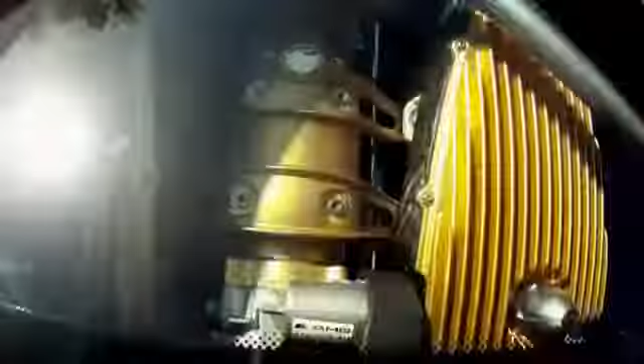This man has driven over 1 million kilometers to develop a new car. But his boss says it's still not ready. This is the story of an engineering crusade to create a car that will persuade the world's richest people to part with €1 million, a challenge that's pushing one of the greatest ever car designers to his limits.

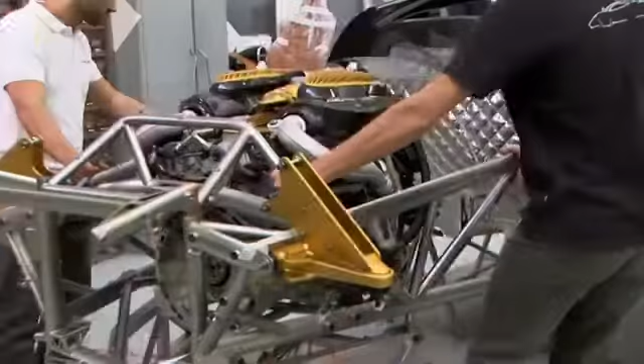In a building that's more like an artist's studio than a factory, a man inspired by Leonardo da Vinci, a man who must be surrounded by the right smells to think, is pursuing his ultimate dream: to build a car that is both an engineering marvel and a work of art. An automotive masterpiece born of a pursuit of perfection so relentless, there's a danger it may never be finished.

Named after a god of wind, this is the Pagani Huayra, a car that has something so special its creator believes people will pay €1 million to own one. But why?

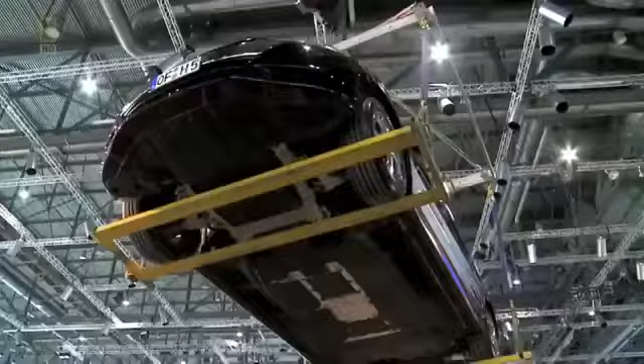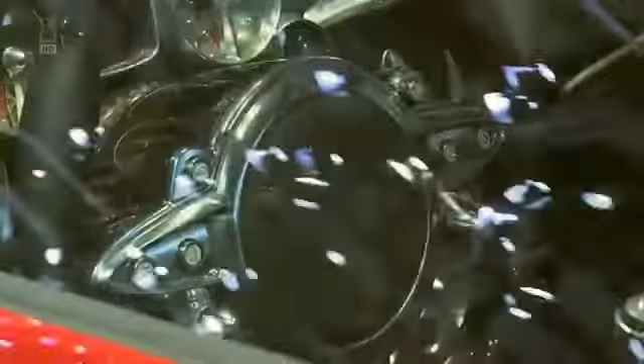10 a.m. The doors open and thousands of journalists and car lovers flock to the Geneva Motor Show. The star attraction is the unveiling of Horacio Pagani's new car, his €1 million Huayra.

But there's a twist. While this may look like a finished car, it's not. In fact, despite years of development, it's far from complete. It may sound crazy to expect buyers to commit to spending €1 million on a car they can't even test drive, but not in the world of Horacio Pagani.

Because this is the man whose first supercar, the Zonda, stunned the world on its launch, and is considered by many to be one of the greatest sports cars of all time.

So within days of the Huayra's launch, Pagani's reputation alone is enough to secure the first orders. And as the Geneva Motor Show comes to an end, the worry for his team is not getting sales, but actually finishing the car so they can build and deliver them.

Back home in Italy, Horacio Pagani has been developing this car for over 8 years. In his pursuit of perfection, he is not a man to be hurried.

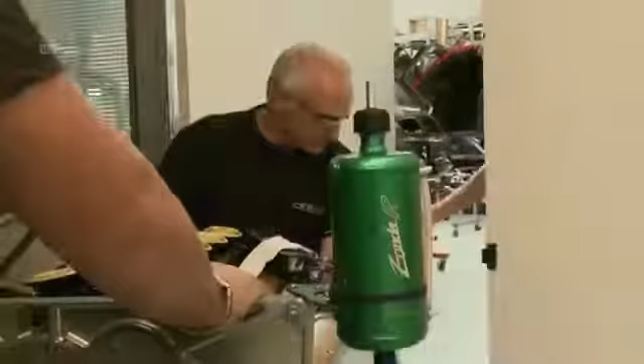Horacio personally designed his small factory, or atelier as he prefers to call it, with his assembly room, component manufacturing, and design studios all under one roof.

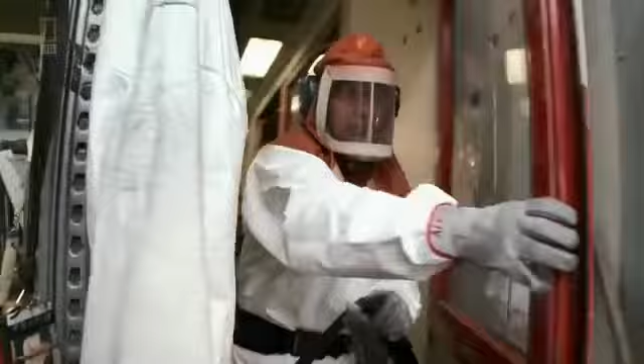This isn't a place where machines are bolted together by robots. Pagani's master craftsmen hand-build engineering works of art. Over the last decade, they've produced 150 unique Zondas.

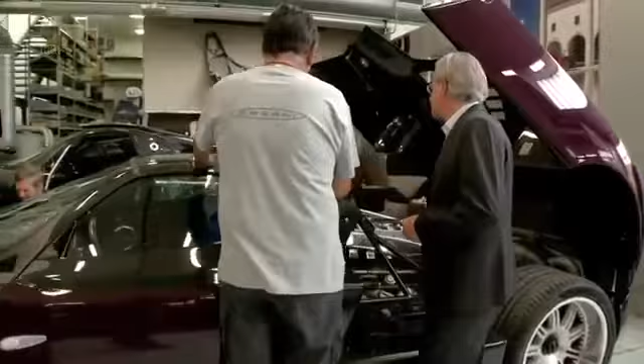But now they're waiting to start building the Huayra, as soon as the boss gives them the nod. But that won't happen until this man's work is done. And 800 kilometers away in Germany, he's still got plenty to do.

Because before any customer will be allowed to drive the Huayra, its extraordinary power and performance must be tamed. Over the last 2 years, Davide Testi has driven a series of Huayra prototypes the equivalent of 25 times around the world. I am the million-kilometer man in the €1 million car. Follow me, and this is my office.

Today, a full 6 months after the launch in Geneva, Davide is getting his first taste of a vital new addition to the car: Bosch's ESP, Electronic Stability Program, a step on the road to a crash-proof car. The system goes far beyond traction control and anti-lock braking, with electronics that can assist or even override the driver to keep the car on the road.

Straight away in this tight corner, I am accelerating fully, and the ESP helps me straighten the car, keeping me on the road. But making this futuristic system work on this car is going to be no mean feat, combining a very light overall weight with a massive 730 horsepower.

Even a racing driver like Davide must show respect. This monstrous 730 horsepower, 1,000 Newton meters of torque is something truly awesome. It's an exciting challenge, but Davide is under intense pressure to get the job done.

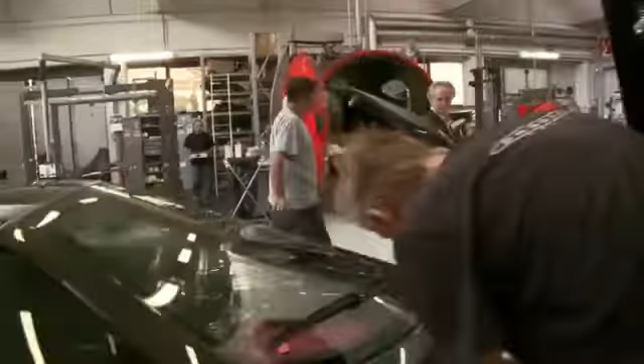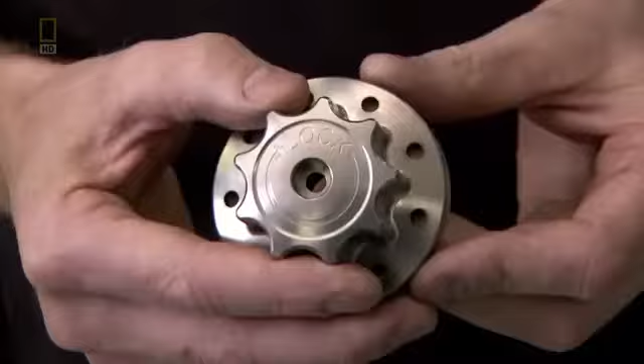Down in assembly, a new chapter for his team of mechanics begins, and the first job is to get their heads around the new parts. Well, this has all been prepared by the guy in the stores. This is a control unit and the ABS. Obviously you've got the monolock wheel nuts here, these are the suspension arms. Perfect, as you can see, everything's got their part number, everything's marked with the Pagani logo. Every washer's like detailed, it's like it's a work of art.

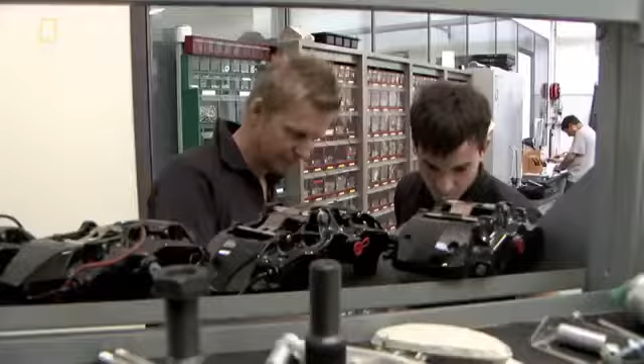Every single thing. Today is a bit of a shock to the system for Dave Lambert, who's built 90 Zondas here in this room. It's all new for us, and it's quite emotional really, because now it's like, nine years I've been used to putting together the Zonda. So this is like everything's new, it's like starting a new job.

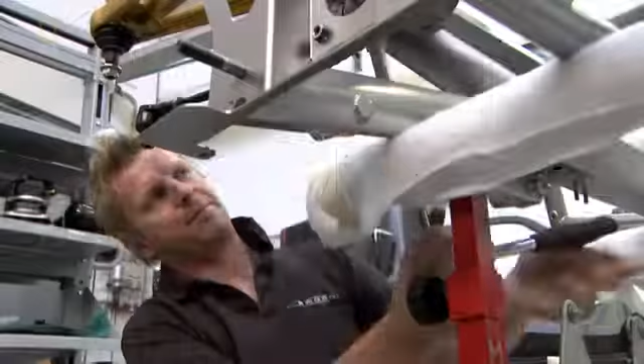The whole thing will be held together with 1,200 titanium bolts at €96,000. That's more than the cost of most complete cars. But there's no manual on how best to build a Huayra, so Dave and his team must make it up as they go along. Our first part of the job is to build the front and back chassis.

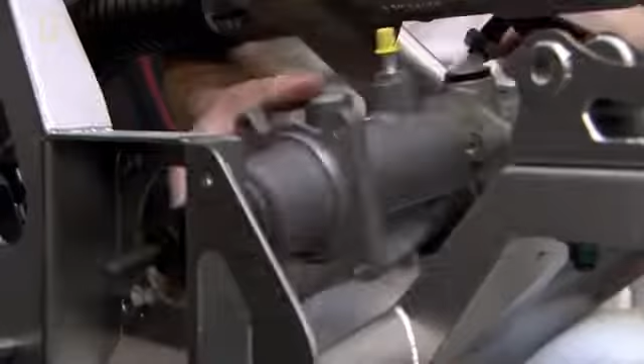The two chassis are lightweight frames made from a very strong form of steel called chromoly. These will later be bolted onto the front and rear of the driver's compartment. Next, onto these frames, most of the heavy mechanical components will be fitted, including the hardware for the Bosch ESP system.

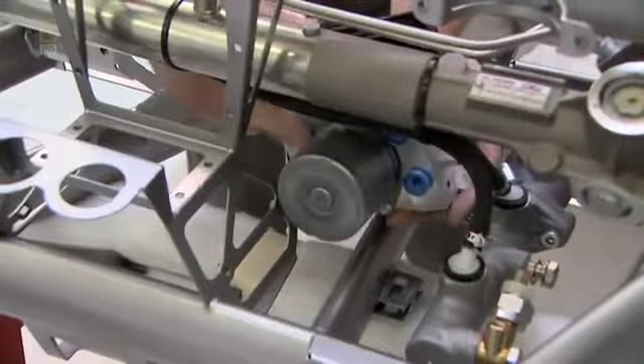But what to do first? That's it, we're just learning that maybe we should have put this on first. Now we've just learned that maybe it's best to put the ABS on before the steering rack. Makes life easier.

While Dave tries to figure it all out, Orazio is never far away, keeping a close eye on the birth of his latest creation. One of the things we don't like about Orazio is that when we go out for lunch, we're just about to clock out and he turns up.

Dave needn't worry though. Orazio is in no great hurry, because even though he has agreed to begin assembly, no customer cars will actually be completed and delivered until the performance has been perfected.

Orazio's vision is to create a car with a split personality, a machine that can provide the legendary thrills and speed of the bad boy Zonda, but has a softer side, a car for all seasons, to take the kids to school or on a luxurious cruise through the countryside.

So this is where the ESP really comes in. It's the key to creating this two-headed god. Davide must fine-tune the system's two very different modes.

First, sport mode. In straight-line testing, with wet and dry lanes, Davide has no problem sending the car into spectacular spins without completely losing control. It's a boy racer's wet dream. I think this is... yes, you can never say how it will work.

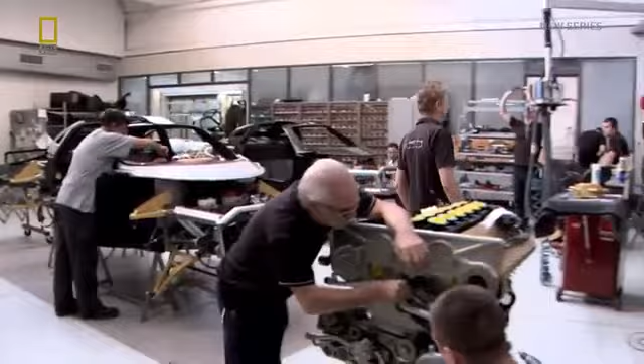Work begins at Pagani every morning at 7:30 sharp. But there's no danger of Orazio ever being late, because his house is inside the factory. He lives and breathes his work night and day.

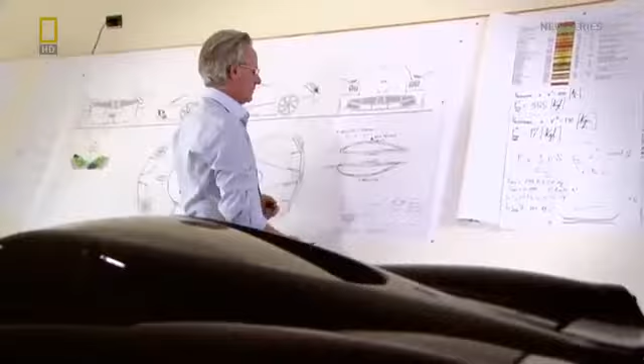With his extraordinary passion for cars, Orazio is not a man to rest on his laurels. So in 2003, despite rocketing sales for the Zonda, he informed his team it was time to pursue a new dream, one so ambitious it would put both his reputation and the future of the company on the line.

Orazio started planning his perfect car with unique engineering features, immense power and speed, but also a softer, more feminine side. Most importantly, named after an Inca god of wind, the Huayra must assault the senses and create intense emotion worthy of €1 million.

This is our mission: to really discover what it is that creates emotion in a client to the point of spending more than one million euros to buy what, in the end, is a car. When there are many other cars that do everything and cost 40 times less than a Pagani.

For Orazio, to create that emotion means combining art and engineering, a philosophy that has evolved from his lifelong fascination with Leonardo da Vinci. Reading an article about Leonardo da Vinci, I found a statement where Leonardo said that art and science could walk together hand in hand. When I read that, it was like a window opened, and I discovered the path I wanted to follow.

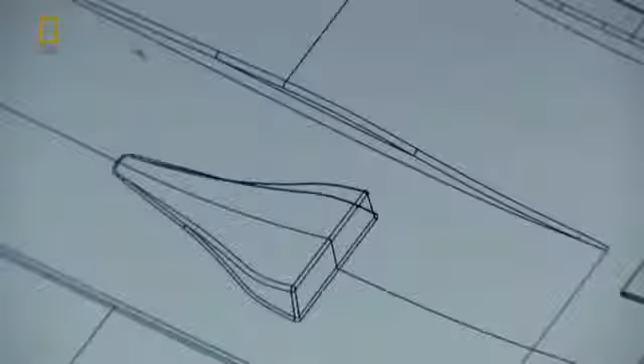The fundamental concept that Pagani communicated to me when I started with his company was his philosophy for work and his philosophy for creating. For him, it is fundamental that an object is both beautiful and, at the same time, functional.

Inspired by Da Vinci, Orazio is determined that every single one of those 4,700 components will not just be made of the finest available materials and be superb engineering — every last bolt and bracket must itself be a work of art.

So Davide Pizzo has had to quickly learn to think both like an engineer and an artist, starting with the overall shape of the car, which is inspired by a great example of form and function in harmony: the wing of an aircraft.

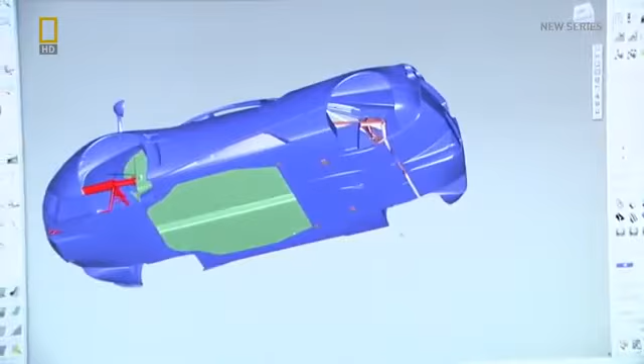So he imagined an ellipse in the front and an ellipse at the back that were united in some way. This was to be the body of the car, onto which the wheel arches were hooked to the sides.

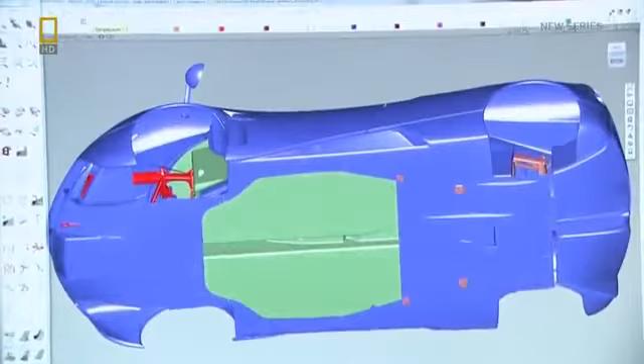From that simple sketch, the long road to the finished design began — from computer screens, to a series of scale models, to a full-sized wooden Huayra.

Pagani asked us to completely clear the finishing area, so the machines were taken outside, the trolleys were moved, and he positioned the model of the car in the middle of the room.

I remember that Pagani spent many hours sitting in different positions around the car, because he had to understand the shape of the car from every angle.

It is only with the one-to-one scale model that you have a complete perception of the shapes and how the lines run. For example, this line that we have been watching for a long time should be more pronounced.

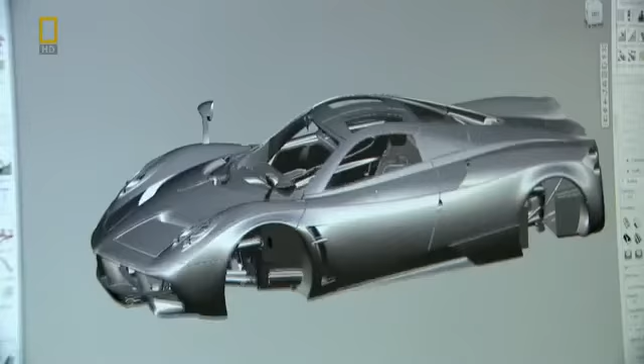At every step along the way, Davide and the design team must think how each small change will affect both the look of the car and its physics — the aerodynamics.

Like a virtual wind tunnel, these computer graphics simulate airflow and highlight areas of drag and downforce. Later, the results can be confirmed in a real wind tunnel. For a high-performance car, you want to maximize downforce but minimize drag.

The problem for Orazio is that most high-performance cars achieve the downforce they need with what he sees as a great big compromise: a rear wing or spoiler. The Zonda is no exception — at high speed, its huge rear spoiler helps glue the car to the road. But for his new perfect car, Orazio wants completely smooth, uninterrupted lines.

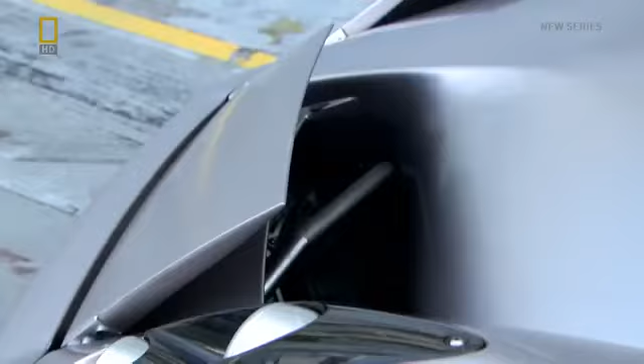To achieve this, he's ripping up the rulebook of sports car aerodynamics, with a solution, if successful, worthy of Da Vinci. Inspired like the car itself by the wing of an aircraft, Orazio has designed a system of 4 independently operating aerodynamic flaps. And what better place to test it than at one of the fastest tracks on the planet?

The 4 flaps are automatically controlled by the car's onboard computer, providing extra grip from downforce only when you need it. You can achieve downforce using spoilers and wings, but the problem is that spoilers and wings are always on the car. Orazio's active aerodynamics remove that compromise.

As the Huayra rockets off down the main straight, the flaps are kept down. This minimizes drag and maximizes acceleration, and the low drag helps achieve a top speed of 370 kilometers an hour.

But equally important to a quick lap time here at Monza is how late you can brake, how fast you can slow down. So as soon as Davide's foot hits the brake pedal, the flaps automatically rise, just like the flaps on an aircraft wing, becoming high drag air brakes while maximizing downforce to get the most out of the tires.

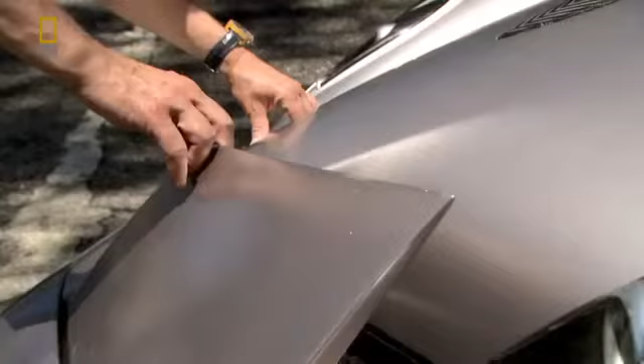If it catches on, this innovation could change the look of all sports cars for the next generation. A technical solution better than a rear spoiler that also delivers the pure, uninterrupted lines that Horacio so wants for this car, and a perfect example of the philosophy of art and engineering that he's been pursuing since childhood.

The son of an Argentinian baker, Horacio spent his childhood dreaming of building Italian supercars. In 1984, he got a job at Lamborghini and moved to Modena, where he quickly became an expert in a new aerospace wonder material being used in sports cars for the first time.

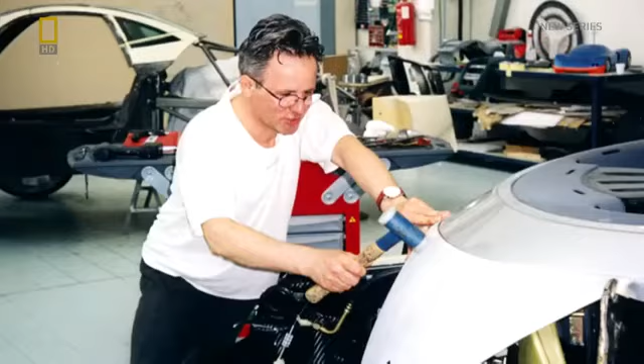Over time, I made friends with carbon fiber, an extremely technological material. Of course, at the beginning, it seemed to me like something from outer space.

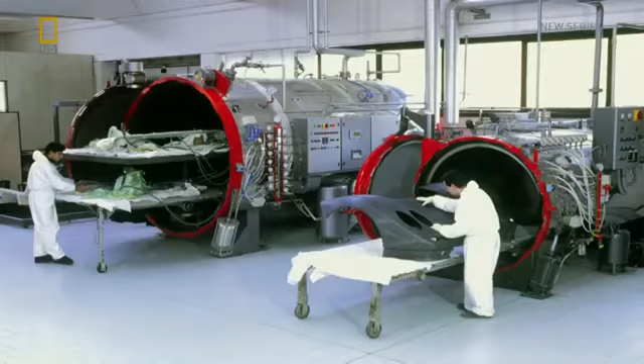When he built his factory in 1991, Pagani started out as a composites company, designing and building components for the industry. Composites have an unrivaled strength-to-weight ratio and the versatility to produce extraordinary objects of desire. So remaining a world master of this material is essential to Horacio's mission to create a perfect car.

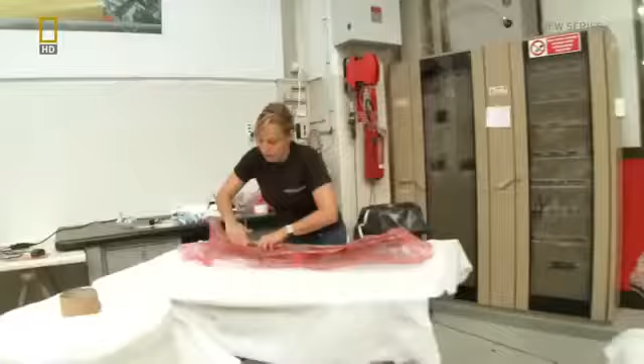Today, the responsibility for keeping Horacio's composites on the cutting edge falls to one of his most loyal young protégés. I like working with composites because it is a very beautiful material. It's Roberto's mission to make the Huayra's composite components the best in the world.

Starting with a unique soft fabric produced only for Pagani, carbon threads from Japan are woven together in Germany, then soaked in resin in Italy. Only Pagani knows the whole recipe. The result is our unique carbon fiber, our fabric.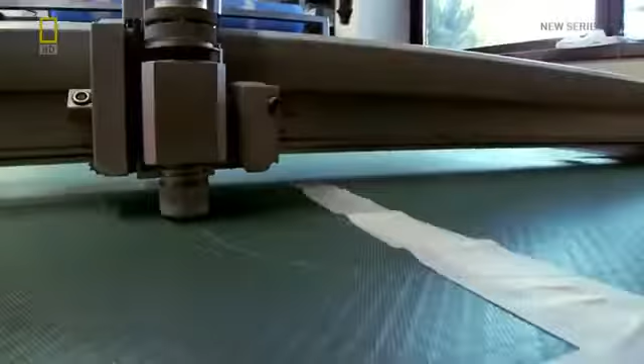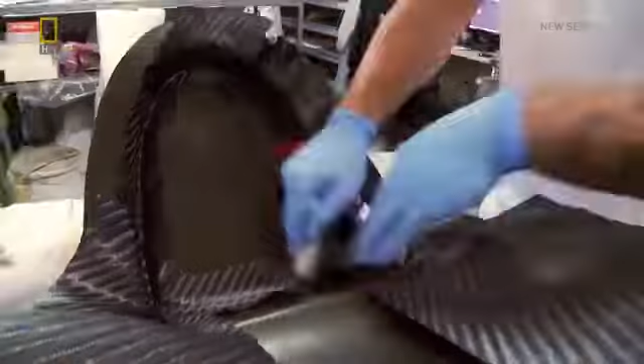In a workshop resembling a Savile Row tailor, Roberto's process of laying up the fabric into molds looks straightforward, but attention to detail here is crucial to the end result. Then, each component is vacuum-packed for baking.

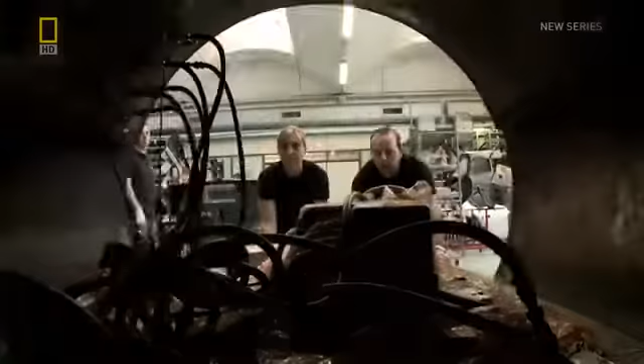Here we are at the autoclave, which is an old friend to me, because without this machine we would not be able to produce our beautiful car. As an expert cook, Roberto knows the exact time, pressure and temperature required to harden each part. After 2 hours at 135 degrees Celsius, these ones are baked to perfection.

Roberto inspects every baked piece, and if it meets with his approval, it's sent off to the nastiest place in the factory, the trim station, where Alessio needs full body protection and breathing apparatus to keep potentially lethal carbon dust out of his lungs.

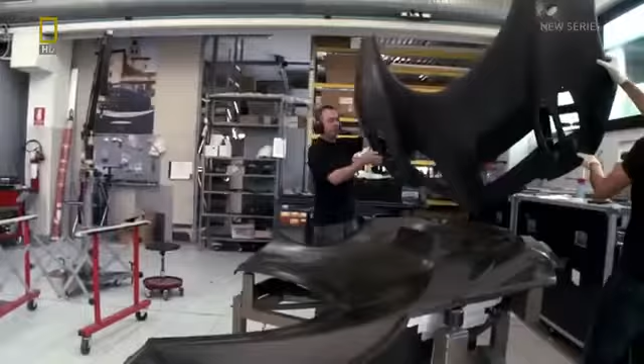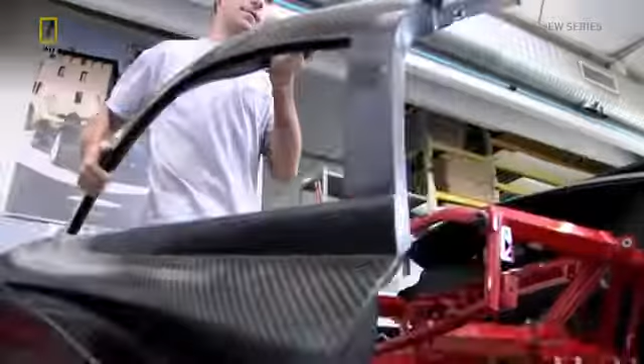Before painting, the composite components are assembled into the skeleton of one of the first customer Huayras. It's a standard step to make sure that it all fits together. But here, there's a difference. This is where Roberto's meticulous care pays off, because every seam of carbon fiber weave must line up perfectly, and if it doesn't, the part will be rejected.

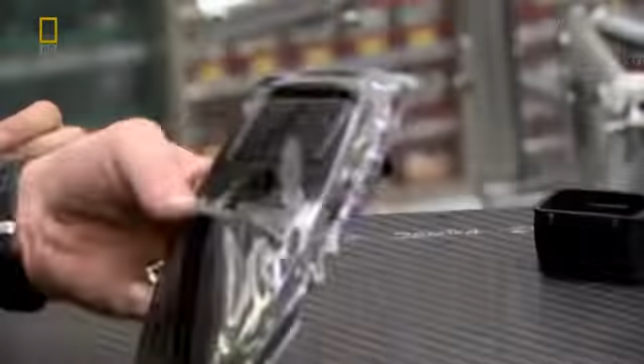The quality is so good, many customers choose to have large areas of polished, unpainted carbon composite as part of their final design. And of course, Horacio has approved each component as a perfectly designed piece of art and engineering, with exactly the strength, weight and aesthetic form he wants.

This piece supports the seat from under it. This is a piece Pagani is very happy with. This is because if one day a client drops a penny and looks for it under the seat, this piece is beautiful.

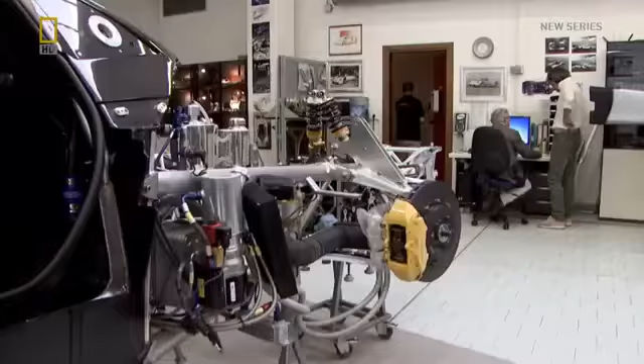As a committed perfectionist, Horacio's hands-on approach is understandable. But to build this car, he will rely on dozens of outside suppliers to build the remaining 95% of its components, and he can't exert the same control over them. Or can he?

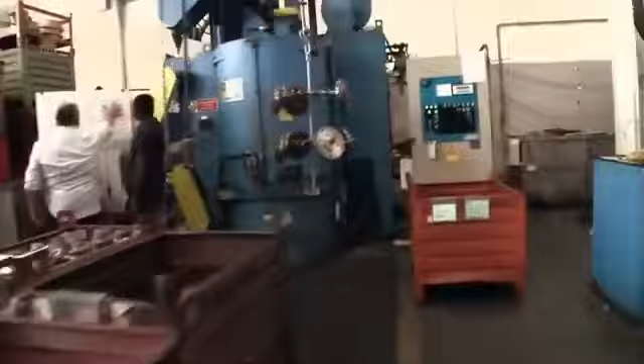On the far side of Modena lies an aluminium factory. 10 years ago, this company decided to try and win Pagani's business, little realizing just what they were letting themselves in for, or how it would transform their lives. Not least for this man.

Benvenuti in Aspa, welcome to Aspa. This is our old factory where we produce pieces for aeroplanes, products for the nautical industry and other products as well.

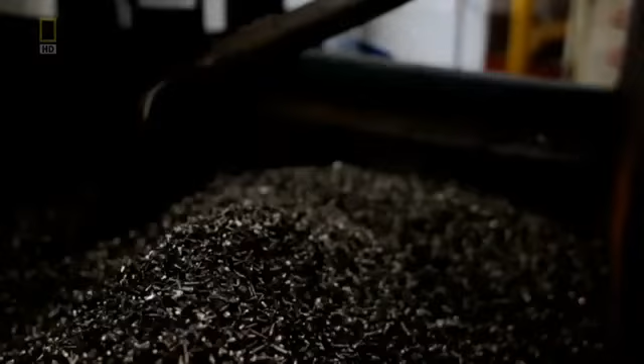It's efficient and functional, but also dirty, noisy and smelly. Not really in line with the Pagani way of doing things. But this is... Ecco, questo è il nostro nuovo reparto.

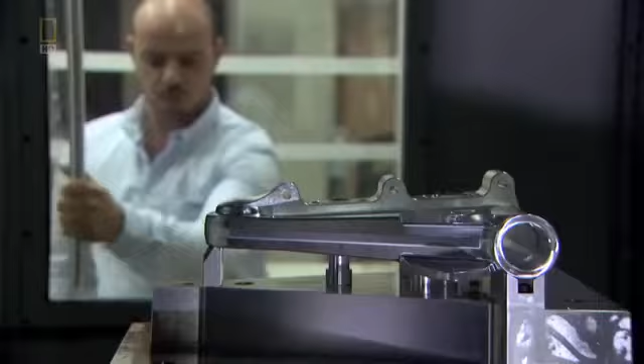To convince Horacio that they were the company to produce his aluminium components, Aspa built a completely separate facility alongside the main factory, filled with state-of-the-art machinery, light, order, and air-conditioned sterile cleanliness. Even the neatness is higher than in the old department, in order to produce what our customers are looking for, especially Pagani.

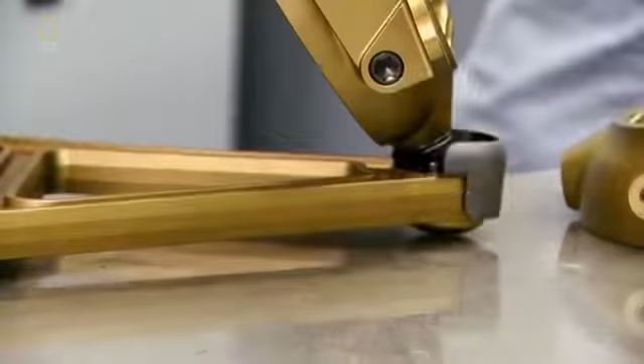As Horacio's collaborator, Maurizio must embrace his crusade for perfection. When Pagani designs something, Aspa must work out how to make it from a single block of aluminium. Sounds simple? Not with Pagani.

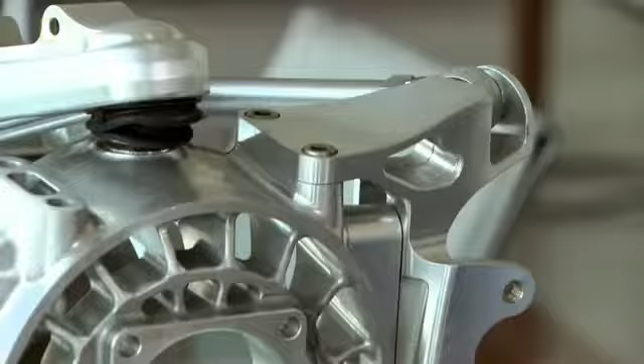Early in the design of the Huayra, the development of this two-part wheel hub became a labor of love. When, after a year of study and work, the first component was created, Pagani had some doubts about it. I was not convinced, because there were many bolts, many components and parts that could break, and for me, it wasn't aesthetically the best.

So the two companies worked together to develop a totally new single-part wheel hub. Of course, it seems a very simple result now, but it required deep research and almost one year of manufacturing. It's not been easy to make, to achieve this result.

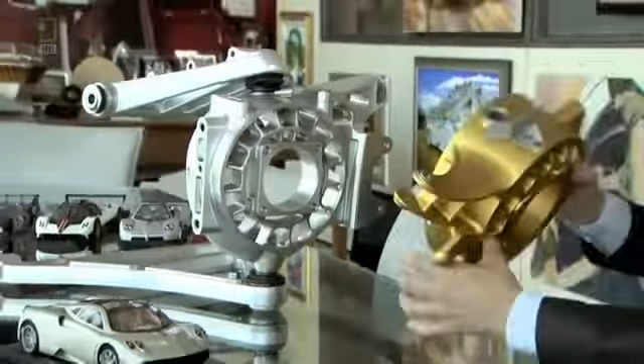It may not have been easy, but the end result cleverly combines two parts into one, saves weight, is cheaper to manufacture, and for Horacio at least, is worthy of exhibition in a gallery.

But apply that approach to 260 different components, and Aspa had their work cut out. Horacio has made Aspa his collaborators, not his suppliers, and he has made them better. The facility they created for Pagani has now attracted over 15 new clients, and business is booming.

For Horacio, this tough, no-compromise approach is essential to achieve his perfect car. So he spent years building up an international network of tried and trusted collaborators, working closely to develop his tires, engine, gearbox. In all, over 95% of the car.

For the leather interiors, he chose a small company near Turin, who he felt were ready to think outside the box.

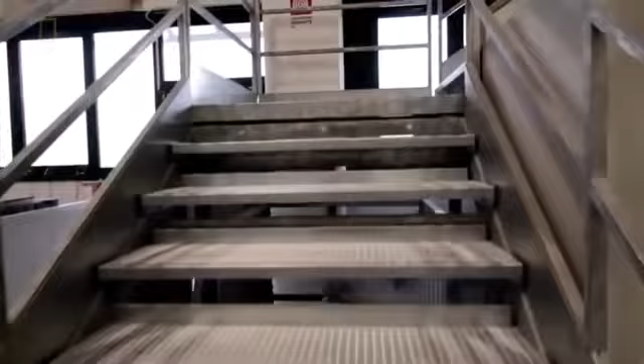Salt is a handcraft leather factory that's been producing luxury interiors for cars, private planes, and even helicopters for decades. And here, Horacio found another kindred spirit.

For us, it's very important to work with Pagani, but it is also a challenge at the same time. It is hard to obtain what he wants, because he is a very particular person who always strives to reach the top, so there is no room for errors.

The leather interiors will be a key part of Horacio's assault on the senses: vision, touch, and even smell. So from day one, he was determined to push Silvio out of his comfort zone.

So before they came in, I sprayed some scent of freshly cut grass, just like when you cut it with a lawnmower. It was a device to take the tone, let's say, of our conversation and also our souls to a higher place.

In that higher place, they might be more receptive to the impossible challenge Horacio had in mind. Something quite feminine. When I told them what I wanted to do, I showed them a lady's handbag.

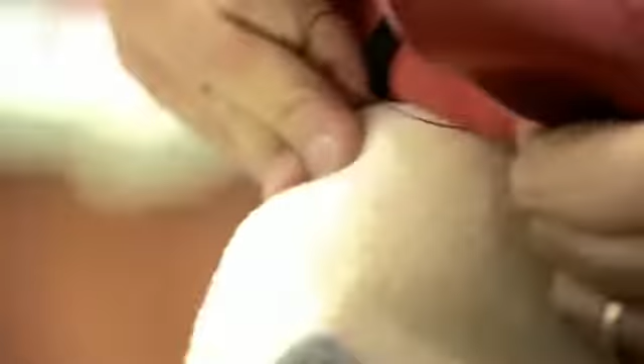Foam padding is applied and shaped. Then the bespoke leather skin is carefully smoothed into place, almost as if it's going back onto the animal it came from. It's stuck on with special maneuverable glue. When the leather's in exactly the right position, the glue is set with a hairdryer.

I think that after all this work, we managed to reach the required level of quality. We're satisfied with the product, and I believe Pagani will be happy too.

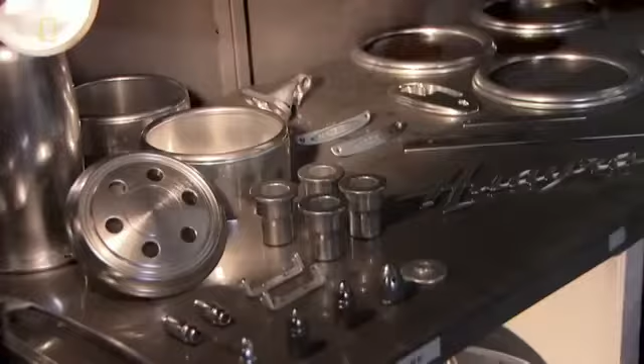Orazio is so pleased with his collaborators' work, he displays their components like trophies in his art gallery of parts at the factory. Orazio may regard them as his art collection, but Dave Lambert's desperate to get them out of the cabinet and onto the new car he's assembling.

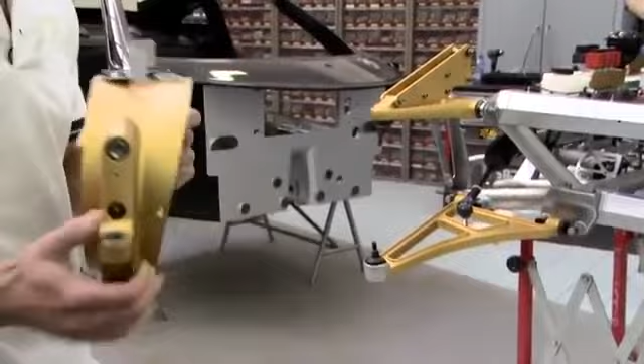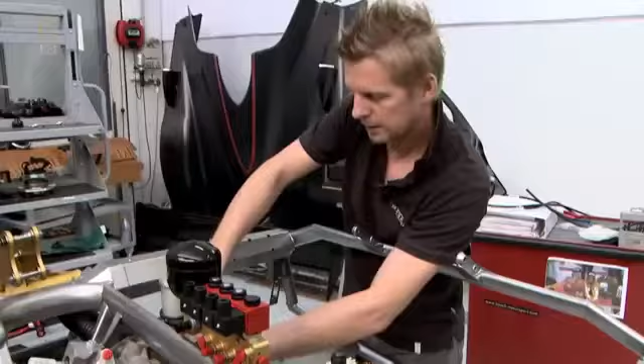The suspension pieces are the first aluminium components to go on. Racing-style wishbone suspension, developed for weight loss, performance, and aesthetics. This suspension here was actually developed first of all on the Zonda R, on the race car. It's very, very similar. It's almost identical to the Zonda R suspension.

With all the mechanical components in place, the chassis frames can be attached to the tub, which is the key component in the safety design of this high-performance car. The tub is a protective monocoque for the occupants, made from the strongest composite material in the car, reinforced with threads of titanium.

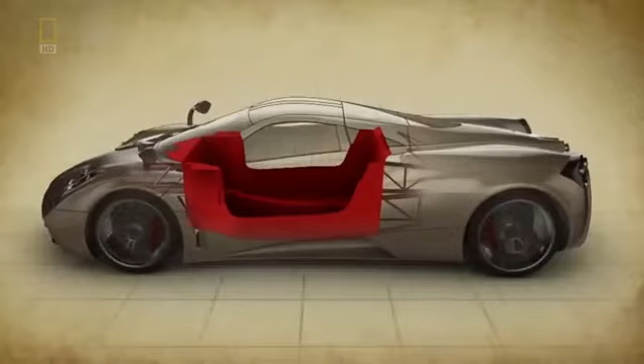But each frame is attached with just 8 titanium bolts. And this is one of the chassis bolts here. Bolts that, when necessary, are intended to fail. In a head-on collision, the chromoly steel frames are designed to crumple, absorbing the energy of the crash in a very similar way to most cars.

But Orazio knows that making a side-on impact survivable can be much harder. So in a high-speed sideways collision, those 8 titanium bolts will snap, and the whole rear chassis will break away from the car, dissipating huge amounts of energy so that the passengers have a much better chance of survival, cocooned in the carbon titanium monocoque.

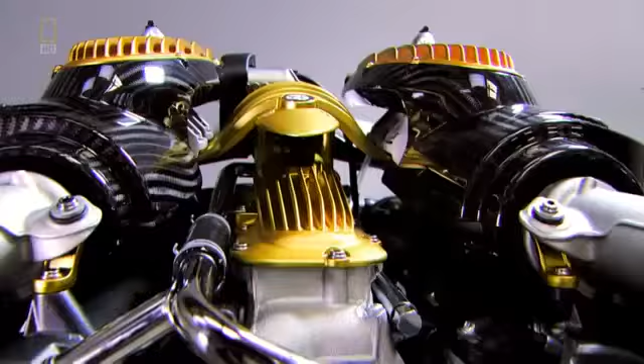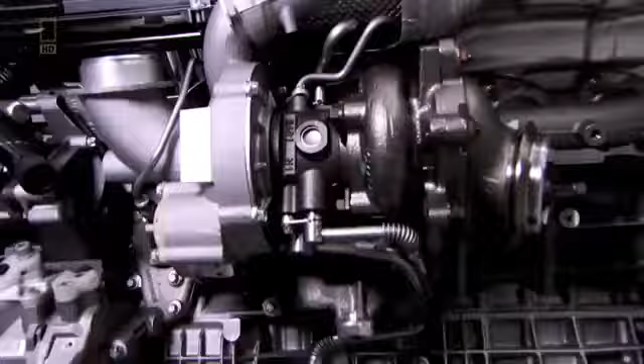A new day brings a new toy for the assembly team. A brand new gleaming 6-litre Mercedes AMG V12 engine, generating 730 horsepower. But it achieves that using a device that most Pagani fans might not expect: twin turbochargers.

A turbocharged engine is the most efficient way to produce the massive power Orazio wants for the Huayra, and will help pass emissions standards to make this car legal for sale in every country in the world. But turbo engines have serious drawbacks.

Pagani made his name with the naturally aspirated Zonda. Its powerful engine has great responsiveness and a mighty roar, qualities not normally associated with a turbocharged engine.

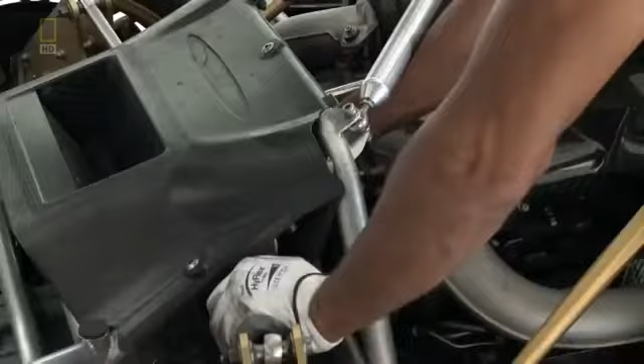So Davide Testi has spent many of his million kilometers working closely with AMG to adapt their engine for the lightweight Huayra. Improvements to the cooling system, the engine management system, and the turbochargers themselves have produced a car with massive but responsive and controllable power.

We arrived at a beautiful compromise. I'd say optimum result, because even though this is an engine with 1,000 Newton meters of torque, the engine is manageable. It's easy to drive. It really is a beautiful engine.

But one very serious problem remained. Turbocharged engines are notorious for sounding weak and whiny. Just not what you need for a successor to the thunderous Zonda.

So to solve this final challenge of creating his perfect car, Horacio went in search of a special talent. A man that can sculpt sound. A master in the dark art of exhaust pipes.

He came to our door, rang and said, 'Hello, I'm Horacio Pagani.' We met each other here and it was a great encounter. We got on right from the beginning. He loves technology as much as I do, especially the beautiful things in technology.

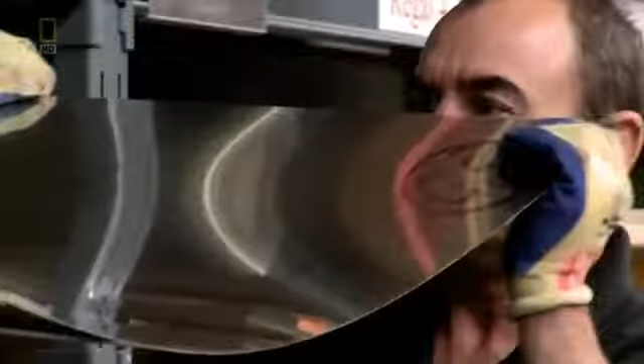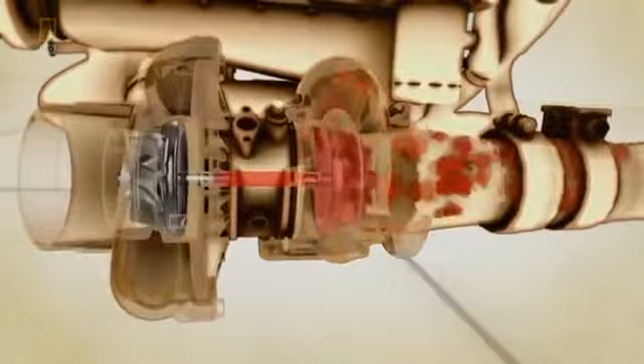So Martin and his factory took on the huge challenge of making a turbocharged engine sound good. A turbocharger is a very efficient way to make an engine more powerful. It does this by using a fan driven by the hot exhaust gases, that drives a second compressor fan that pumps more oxygen into the cylinders, producing more power.

The problem is that the turbocharger breaks up the flow of the exhaust gases, mashing up the beautiful thumping V12 sound coming out of the engine. It's like a nose being held, so it doesn't allow sound to travel like in a naturally aspirated engine.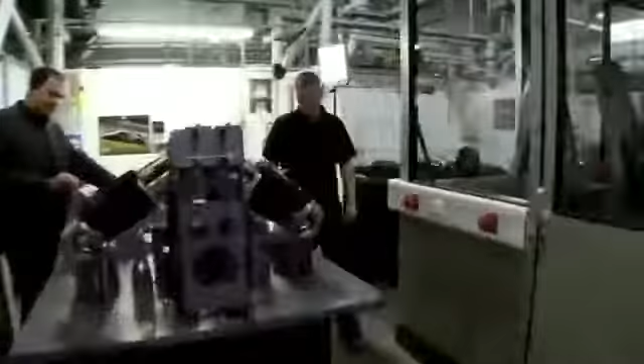Martin Hagler specializes in making engines sound beautiful. But to achieve that with the turbocharged Huayra, he's going to need something very special. Fortunately, he has a plan.

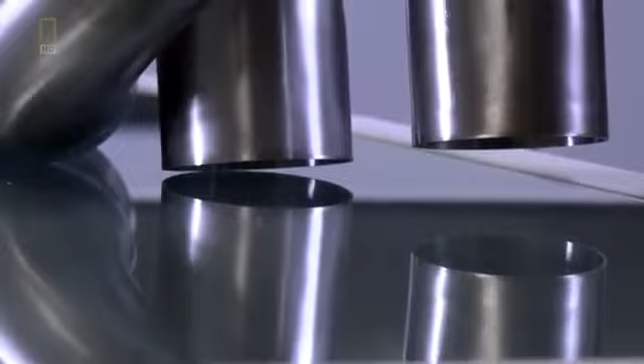All that you can see here are parts that are tuned exactly to the acoustics of the engine. And that's the basis for the sound. It is the same as the tuning of an instrument, like a horn.

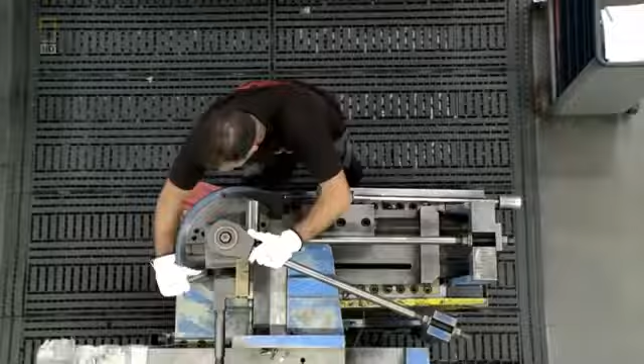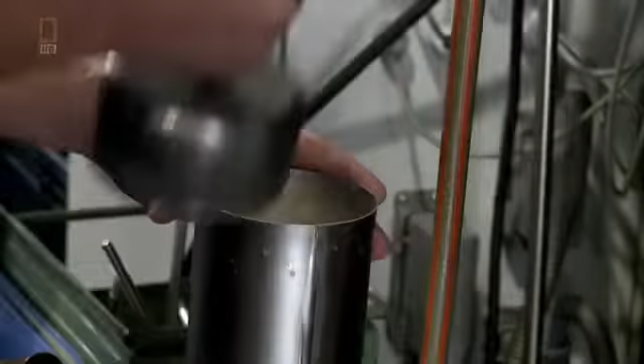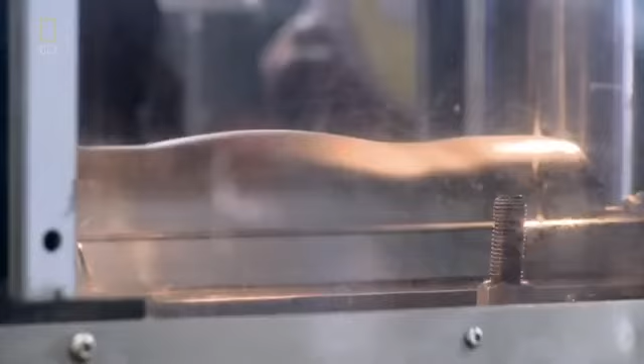Often complex shapes, many of Martin's components require an ingenious process to form them, called hydroforming. The silencer is made this way. A straight pipe is first filled with water, then laid in a mold inside a hydraulic press. The water pressure inside is pumped to 1500 bar, which stretches the millimeter-thick titanium into the desired shape.

It's a very natural shape, very stable. And when you lift it up, you notice it is not heavier than plastic.

Already a thing of beauty, Martin has another trick up his sleeve to enhance the silencer still further. A trick that simply involves a dusty old oven. No chemicals or additives, just heat and precise timing. It looks like a magic trick, but it's a natural process.

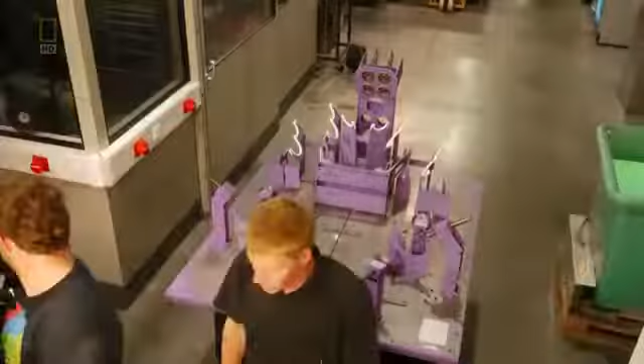Together, Martin believes the 14 sections of pipe will deliver some stirring turbocharged music. First, he splits the mashed-up exhaust from each turbo into 2 separate tubes. This smooths the quality of the sound.

Then it passes into the silencers, which in fact aren't silencers, but the opposite, empty echo chambers that amplify the sound. Inside, Martin has left a small gap, like the hole in a flute or a recorder, which the now smooth air blows through to create a roar.

As always, the first to find out if this ingenious design has succeeded is Davide Testi. Driving the Huayra for the first time, you have a feeling of something really massive beneath your back. And the loud noise of the turbos, if you close your eyes, makes you think of an aeroplane about to take off.

For the car inspired by an aircraft, Martin has given Horacio a jet engine roar.

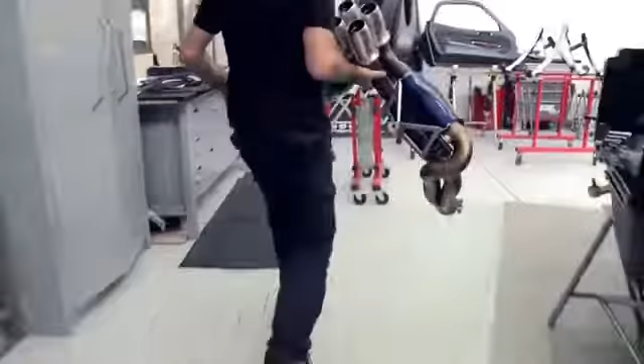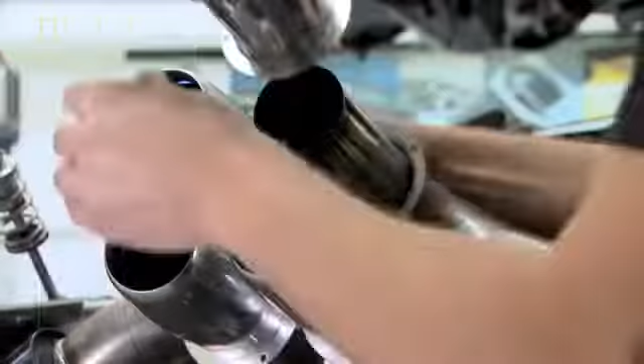With the delivery of the exhaust system, Dave and his team now have all the components they need to complete the first customer cars. The output from each turbocharger is fitted with a catalytic converter, and then the rest of the exhaust system can go on.

Onto the chassis, the skeleton of the car, goes the wiring, the nervous system of the machine. Now work on the interior can begin. Polished carbon fiber panels and soft Turin leather to the customer's exact specifications.

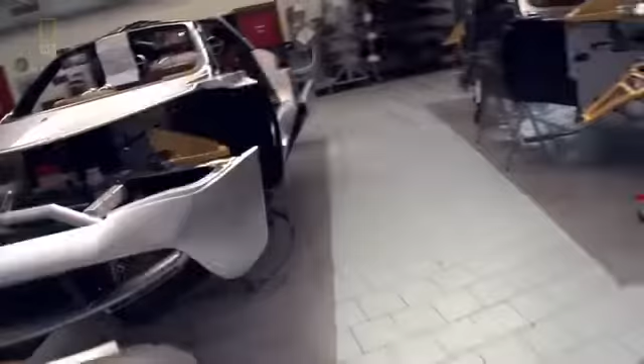Finally, Roberto's outer composite body parts. The bonnet, doors and side panels go on. And after 3 weeks of assembly, the car is complete.

Which means it's time for Davide to take one last drive, to find out if the Herculean task that has taken him 25 times around the world is done.

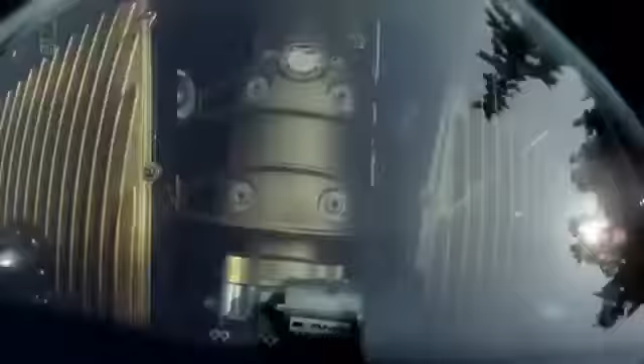With turbocharged power and the ingenious exhaust, unique aerodynamics, fine-tuned electronics, and a set of Pirelli's finest tyres, does it thrill with the thrust and roar of a jet aircraft taking off?

A big sigh, and let's say that we are really very happy. I believe that the Huayra is an heir worthy of the Zonda.

The million-kilometre man thinks his work is done. But does his boss agree? Is he finally happy with these lines that he's watched for years?

It has taken time and years of development of materials to enable us to reach this level of perfection, these details, these exteriors.

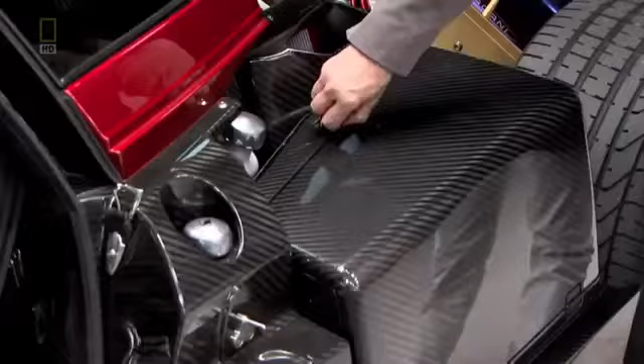So is every smallest detail now perfect? The customized leather luggage, the air intakes that evoke a supersonic jet, the mirrors inspired by a woman's eye, the carbon fiber like a tailored suit.

Inside, the leather with the soft feel of a lady's handbag, the intricate aluminium gear shift, the buttons inspired by a clarinet, the dials produced by a Swiss watchmaker. Everything is machined and then finished by hand, because the artist's hand gives the added value that the machine, while accurate, cannot give.

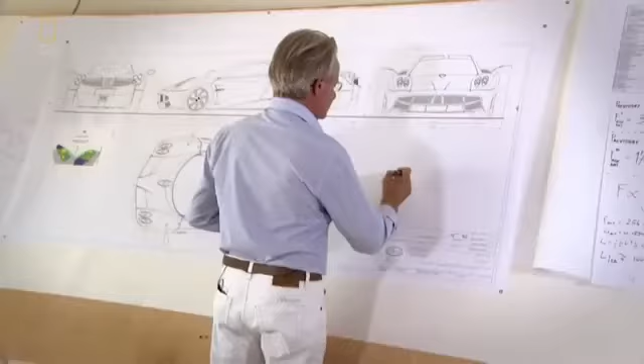So after 8 years of development, over 1 million kilometers of testing, endless design and redesign, and collaborators pushed to new limits, it's all come down to this. The moment that Horacio Pagani must decide if his masterpiece is complete, and he's ready to share his creation with the world.

Will 60 buyers finally get their cars? Or is the pursuit of perfection a road without an end?